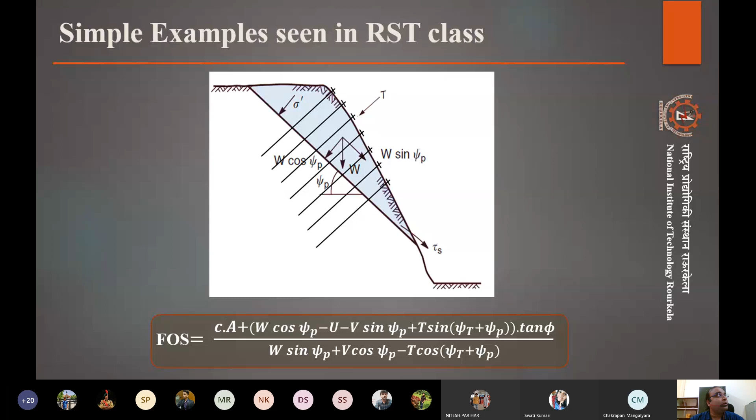for Thursday's lab, what I would suggest is we make a few programs and we write these programs in MATLAB, and we use the questions from the rock slope technology assignment that we were discussing, right? So the three questions that I was thinking we can work on are second, third, and fourth. These are simple questions that basically require us to find out the geometries, find out the weights, find out the factor of safety, and sometimes find out the tension.

So I will upload this. Don't worry, these individual questions I will upload. And what I want from you guys is a MATLAB program that is working. We can try it out online, or you can try it out on your MATLAB that is installed. Try to do it systematically.

If you can do it in a way that you first make a flow chart or an algorithm out of it and then make a program, that will be much easier for you guys. It will be intuitive as well if you are missing something, and you can plan the program very well. Otherwise, if you are used to programming, then go for it. Sky is the limit in this case. Make a good program, an attractive program that will ask the user to input these parameters like cohesion, friction, what are the dimensions, right?

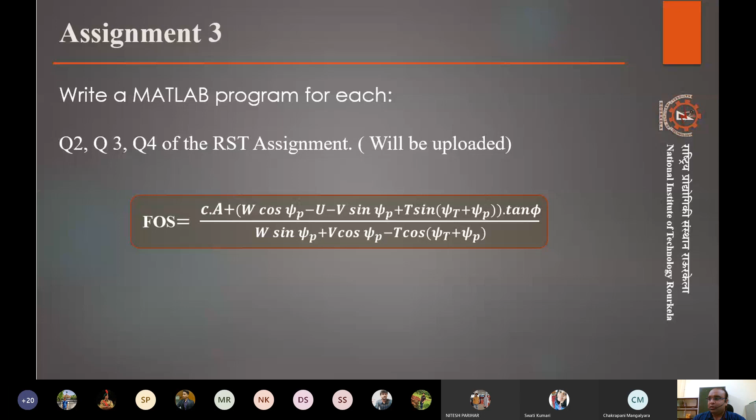Can we discuss this on Thursday? Is that okay? Thursday, I think you can do, right? Today is Monday. So Tuesday tomorrow, and Wednesday, no classes are there, I hope, right? So Thursday in lab class, we will be discussing this. I will be uploading this today, so you guys can work on it. Okay. Yes, perfect. Okay, so I'll move on now.

Any intuitive approach, basically, because right now we know that we can have C, we can have phi, we can make a block slide, and we understand how it works, how the factor of safety can be calculated in that case. But if this is a circular failure, then how to approach this? Can any of you volunteer any ideas how to deal with this kind of failure to find the factor of safety or similar? Any ideas? Anyone?

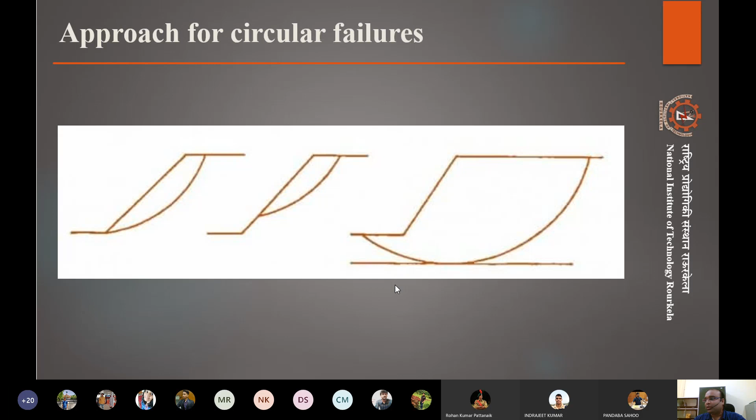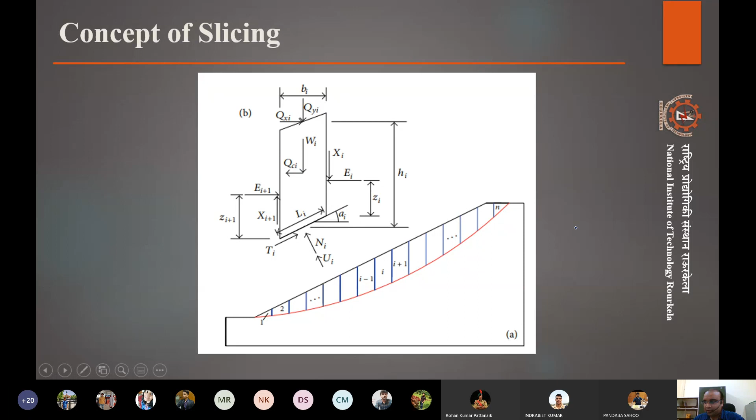They will be separated by a certain distance that we will be using for calculating how far the center is with respect to the overall origin of the area, right? So we have so many points of centers. Now, what is the other variable? We know the centers. Now we have the variable of radius. So for each center, we will have maybe 100 sets of radius.

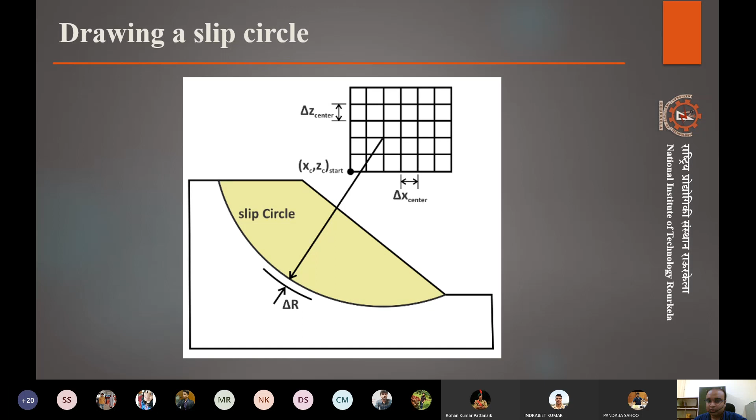We will be seeing how these things are done while discussing the software. Okay, so that was just an idea of how things are done. Now I will show you how this is actually done in a software. So now take notes and be attentive to how things are done, because you will be doing these things in some of the lab classes that we'll be having later on. So one of the most popular softwares that we use is called Slide.

Okay, Slide is basically limit equilibrium based software only. So what we discussed right now, all these kinds of calculations, this is designed to do that. The version you are seeing here is a very old version because I had a crack of this, so I have this in my computer. Right now the version that is licensed to NIT, the renewal of these licenses is going on, so maybe we will have the updated one next time.

But for now, the concept remains the same. The full fundamental remains the same. Just the GUI has changed, the graphic user interface. So there the buttons are bigger, the menus are very stylish and so on. But all the concept is the same.

Okay. So before starting this, I would like to show you one very interesting paper. These guys basically have done a good descriptive analysis on the technical aspects of limit equilibrium methods. So where is it? Yeah. So what I will do is I will share this paper with you. This is not a very old paper. It's from 2014, not a very recent paper as well. But generally what they have done is basically given an idea of what is the slice-wise factor of safety in limit equilibrium method.

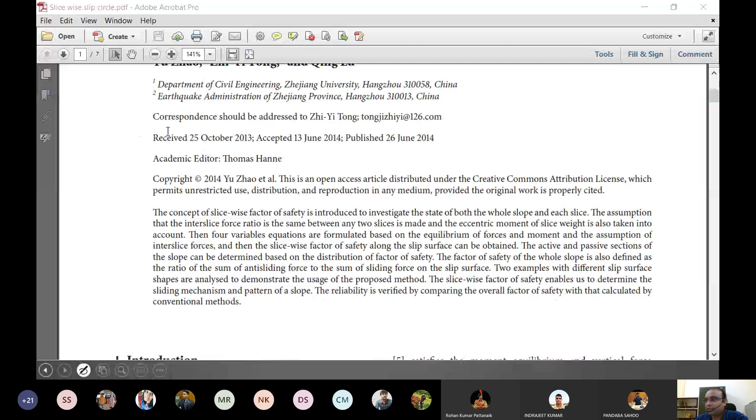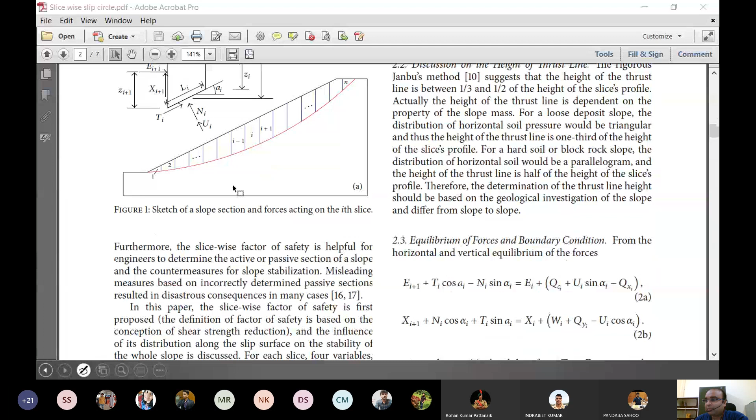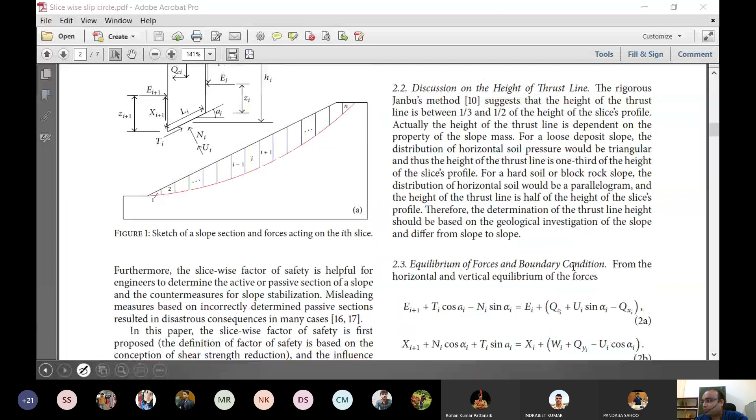So this figure I took from them only. And the balancing and equilibrium forces we were talking about, they have basically given a full detail of these, which forces are acting, how these forces are in equilibrium, which equations we do for equilibrium forces. See the boundary conditions we were talking about, what are the boundary conditions, how they are applicable, right? And how to calculate the overall factor of safety, how the balancing is done, how the slicing is done, right?

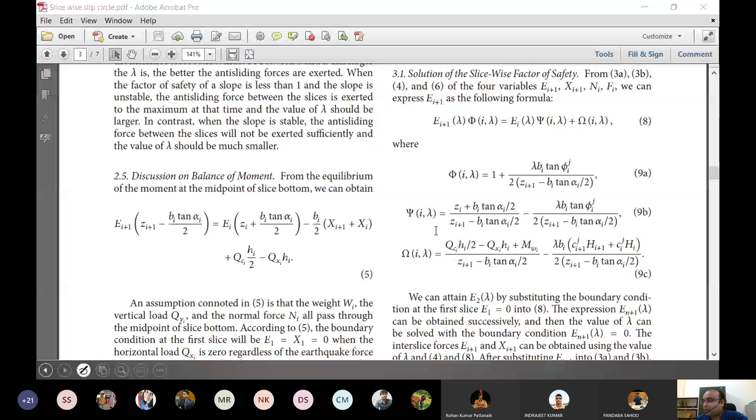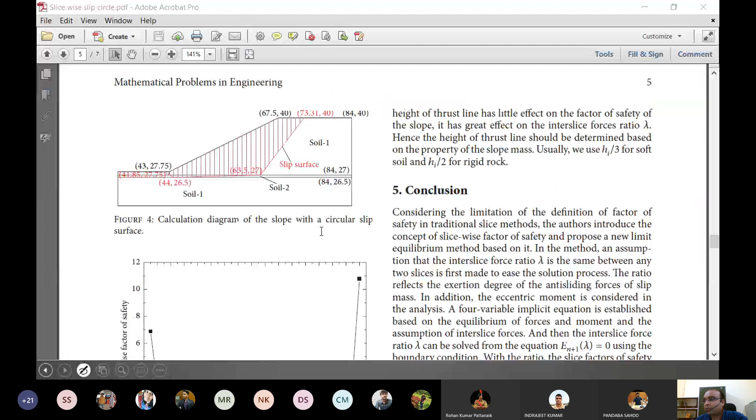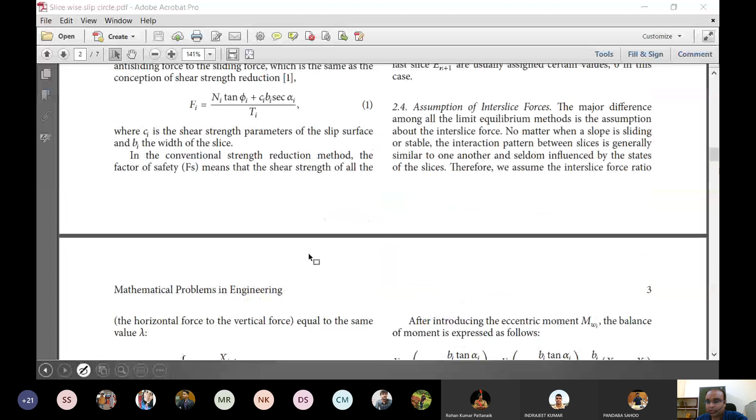And all these fundamentals are there, and they have given a few examples of how they had applied this. They used some software for that as well, like we are doing. The only thing I want you guys to see are some of the equations and some of the calculations that they have given here, which will be useful for us when we think about how the mathematical aspects of this work.

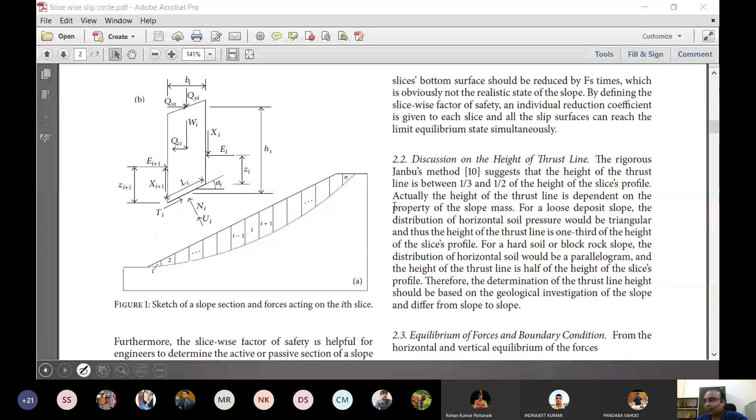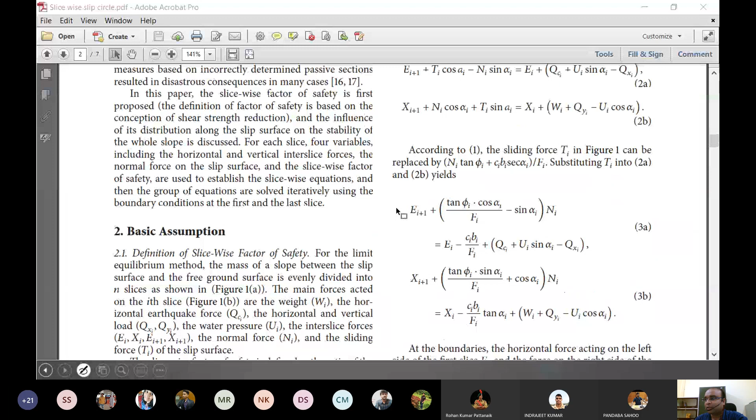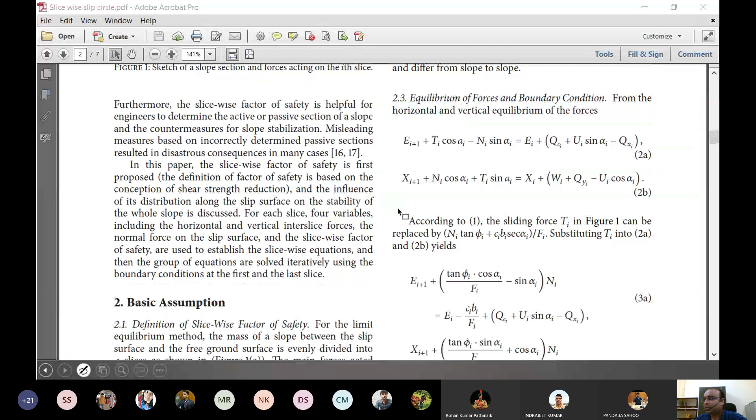So see, using a software is easy for anyone. Anyone can use a software and find out some results and publish that. The difference between us and others is we know what is happening inside also. So whenever we discuss a software, we will be trying to also see what is the fundamental behind it, right? And what are the conditions that are taken, what are the limits, or what are the boundaries of that software beyond which it can't work. So as an engineer, we need to know these because just learning software is not our work. So that's why I wanted to share this with you.

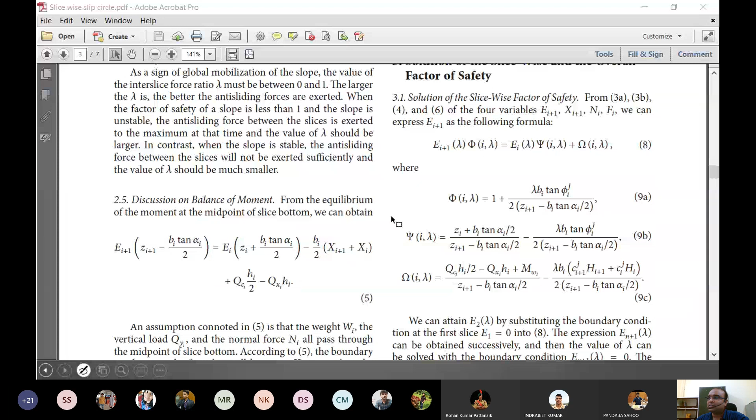Have a look, go through it. We can have some discussion if that is required, but I feel this is a very simplified explanation of what actually is going on. There are full books written on limit equilibrium method, so if anyone is interested, they can actually refer to them. But I found this paper to be a very simplified explanation of the whole concept of the slicing method in limit equilibrium. So yeah, I'll share this with you guys in MS Teams so you can have a look.

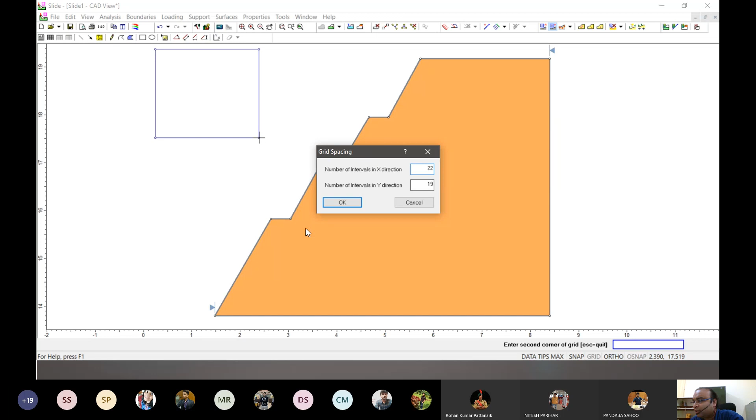Now we create the grid that we were talking about, the grid for finding the centers. We can draw it manually, and there are options for auto grid also. So now we have drawn this grid. It will ask us how many in the X direction and how many in the Y direction. It has automatically calculated 22 by 19. So let's keep it that way. We can change it if we want to, but let's just do the analysis first. Okay, this is the grid. So there will be so many centers and they will draw the slip circles, right?

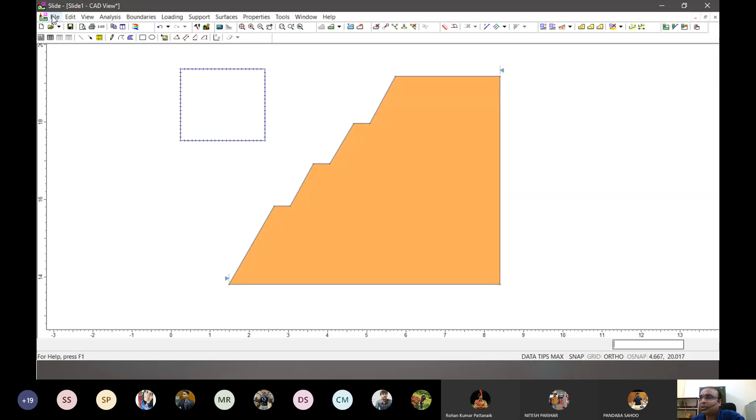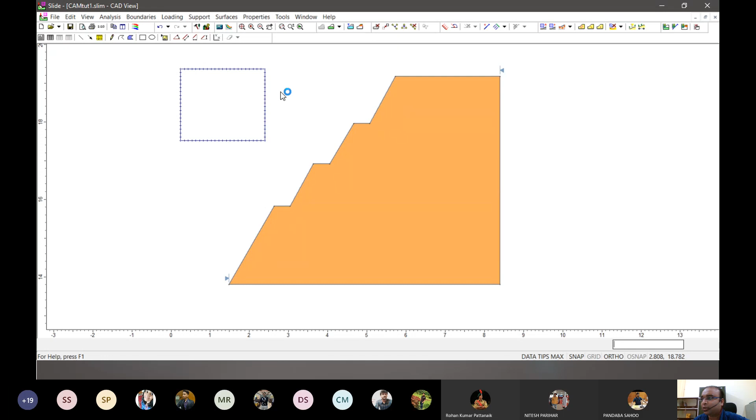And what else do we need? That's it, I think. Let's save this file. CAMtut1. Okay. And to run it, we run compute. So it will open something like this and it will compute, right? When it has done computing, it will close, and you see this interpret option will open. If we open this interpret, based on what kind of computer you're using, it takes some time.

So you see the whole grid is divided into some shade; that is the safety factor contour. And what we are looking at is the least factor of safety, 1.24, which is coming on this slip circle. We had chosen 4 different calculation criteria, so we can see what the effect is on the other calculation criteria. In Janbu simplified, it is less, 1.17. In corrected, it is okay. Spencer, it is 1.3.

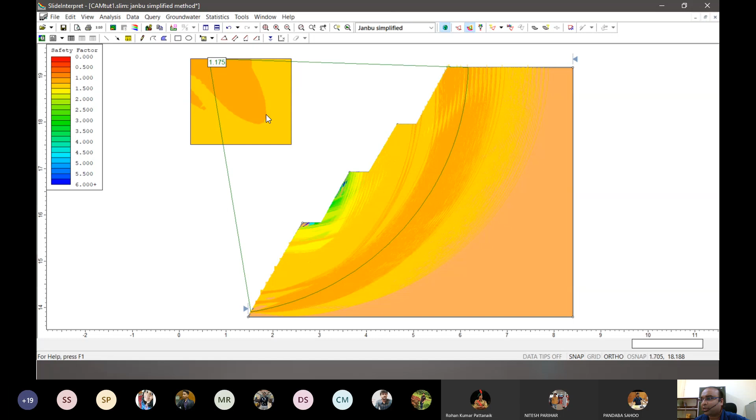So you see how similar slip circles are there. We can also see other slip circles, how they are behaving, and what their factors of safety are with respect to the contour. So that's how we do a very basic factor of safety calculation for this. I will stop here because we are out of time now. But when we join tomorrow, we'll continue this and see how other options can be explored. In detail, we will discuss this.

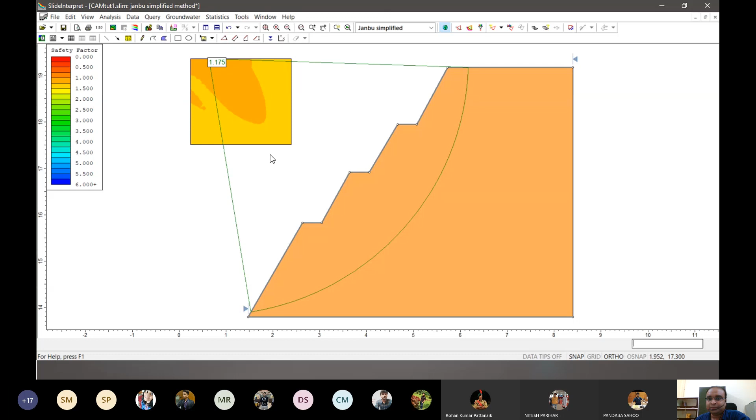I think what we are starting now will be a much more interesting part, because we are solving the practical problems that we will be seeing in mine scenarios. Slope stability, dump slope stability, mine slope stability is one of the major areas where we have to focus. So this is the start. We'll keep looking, and I want you guys to get hands-on training.